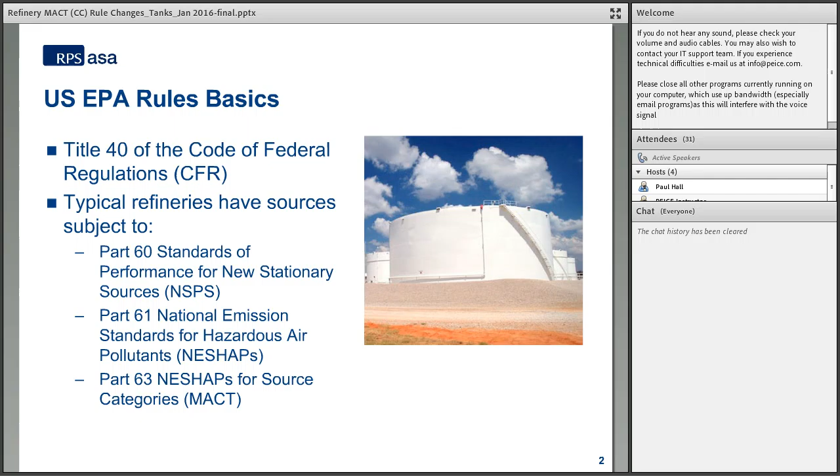So when we look at Part 60, the definition of source, when they say new source performance standards, those sources are going to be emission source specific. So the storage tank would be considered the source. When you talk about the source categories in Part 63, those sources are going to be considered the entire site as the source. So a refinery would be categorized as the source, where each individual storage tank supporting that refinery, located at that refinery, would not be considered the source under that definition.

Under MACT CC, 40 CFR 63 subpart CC, the original rule was published back in '95, and there have been several changes throughout the years. You can look under the Federal Register here. I have all of the changes that were made over the years listed here. The most recent, which we're interested in today, was published December 1st, 2015.

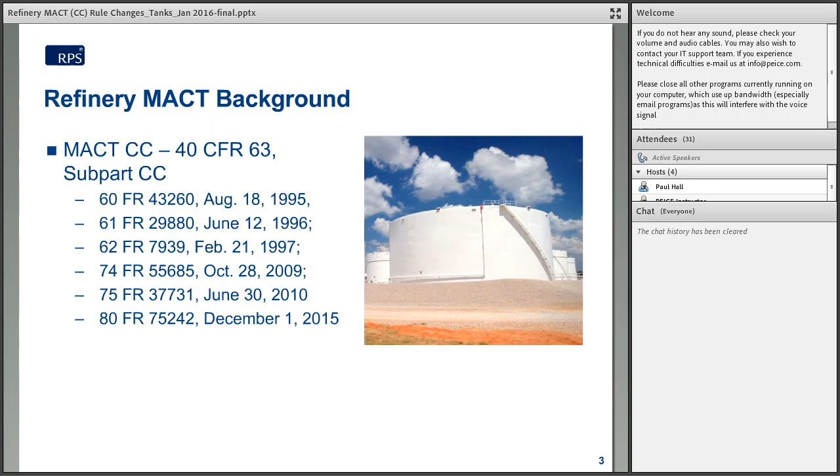Because of those changes, there are some major applicability and control requirements that may be triggered. So when we look at the control requirements for storage tanks, we need to make sure we're talking about the applicable tanks at the site. The MACT structure is set up such that you have a Group 1 storage tank and a Group 2 storage tank definition. Group 1 storage tanks will be required to comply with all of the controls, monitoring, record keeping, and reporting. Group 2 storage tanks are everything not defined as Group 1, and those will be exempt from the add-on controls and reporting and record-keeping requirements.

Under the definition of Group 1 storage tank, for an existing refinery built prior to 2014, these volume constraints used to be: the volume cutoff used to be anything greater than or equal to 47,000 gallons would be applicable.

Now the EPA has changed that to have two different volume cutoffs. One is from 20,000 gallons to 40,000 gallons, and the other being anything greater than or equal to 40,000 gallons. So whereas before if you were below 47,000 gallons you were automatically exempt from Group 1 status, now you have to look at only anything below 20,000 gallons as automatically exempt.

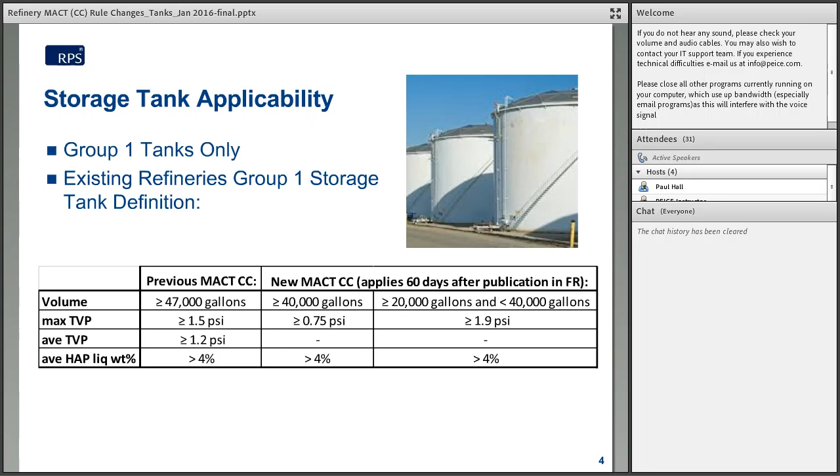For a new refinery or a reconstructed refinery, the definition is different. Again, there are very few new refineries in the U.S. The only ones I know of in the last couple years being built now as new refineries are the condensate splitter units at several terminal facilities, enabling them to take the shale crude condensate and process it further into additional refined products for further shipping.

I know of a couple of them recently that have gotten the applicability determination from the EPA that they will be subject to MACT CC and will be treated as a refinery process unit. So any storage tanks impacting, feeding, or handling products from that condensate splitter unit will have to comply with this definition for Group 1 storage tank.

The main change here is, as you can see, the previous MACT had the breakdown from 20 to 40 and anything greater than 40. Those haven't changed, but the vapor pressure requirement for tanks between 20,000 and 40,000 gallons has gone from 11.1 psi to 1.9 psi. So that's basically almost every product that is required to be in a floating roof tank potentially subject.

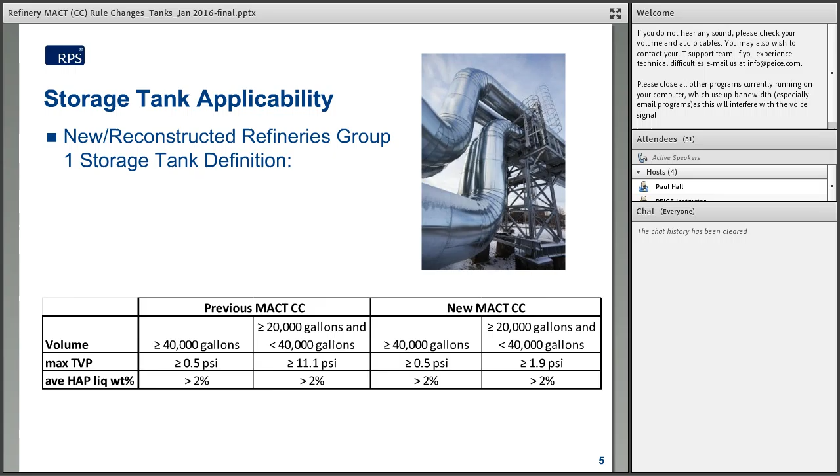So now, once we've determined which Group 1 storage tanks you have at your site, whether existing or new, there are some exemptions for which control strategies you're allowed to choose. If you're an existing or new storage tank or facility with a Group 1 storage tank that's also subject to the new source performance standard KB, then you can elect to continue to comply with KB, with some exemptions for delaying repair and inspections, and some clarification on guide pole controls, meaning you have to comply with the no visible gap requirement for your guide poles.

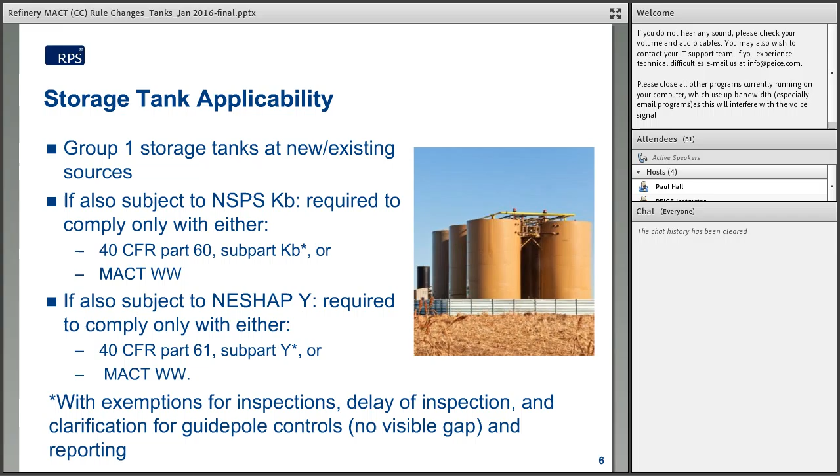So you can either comply with KB with these minor exemptions, or you can elect to comply with the MACT WW, which is the uniform storage tank regulation. So you can elect to comply with either. If you're also subject to NESHAP Y, which again is the National Emission Standard for Hazardous Air Pollutants for benzene, specific to benzene storage tanks, then you can elect to comply with either subpart Y, or you can elect to adopt the MACT WW.

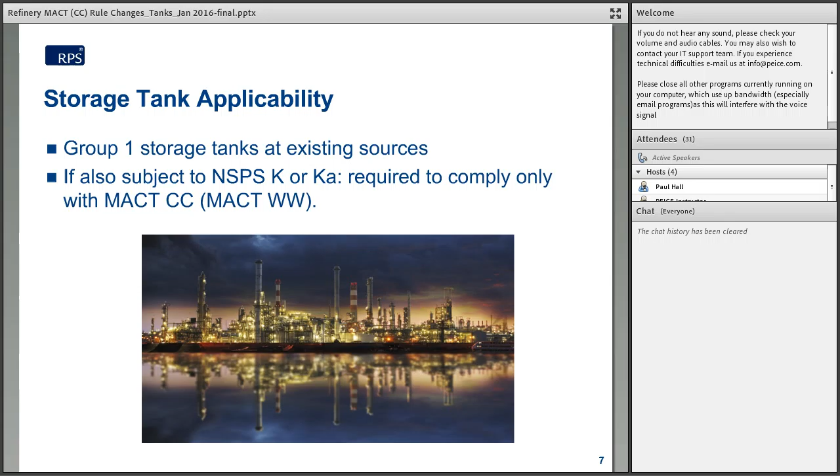If you are a Group 1 storage tank at an existing source—and several of these refineries out there will be an existing source—and you're also subject to NSPS-K or KA, these are the new source performance standards for storage tanks that came out prior to KB, then you'd be required to comply with MACT-CC, which references MACT WW.

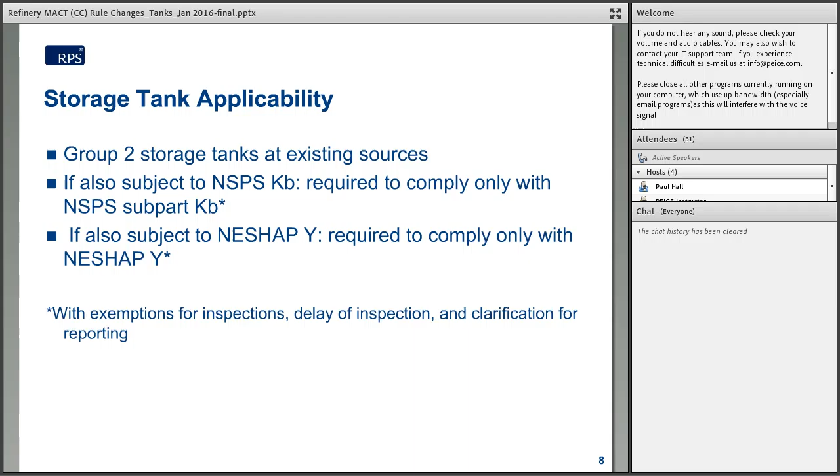Group 2 storage tanks at existing facilities: if you're subject to KB, then you're required to comply with KB. If you're subject to NESHAP Y, then you're required to comply with NESHAP Y. If you're at a new source and you are applicable to NSPS KB, but you were not required to apply controls under KB, then your applicability under MACT-CC will now have MACT WW trump. So you're going to have to look out for any Group 2 storage tanks at your new sources that were not required to comply with controls. Now you're going to have to look at the WW applicability. And same with NESHAP Y—you'll have to comply with WW.

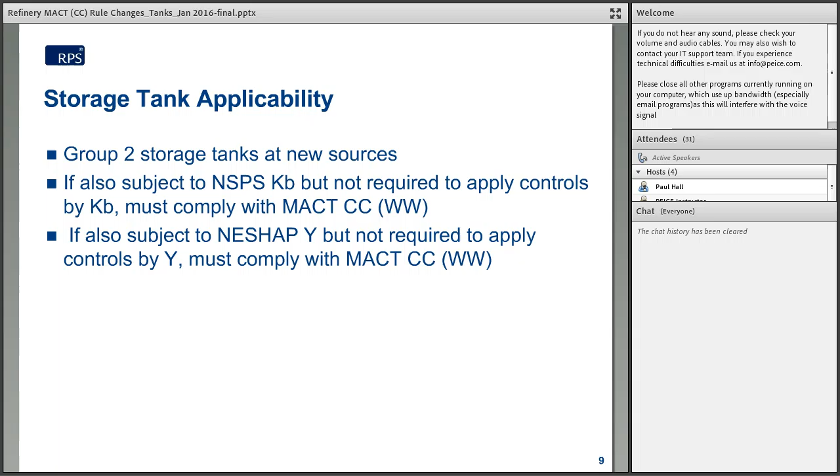So the previous MACT, Refinery MACT-CC, referenced subpart G for the non-NSPS KB tanks. Now they're going to be referencing WW with some additional clarifications. And because of these MACT WW issues, they're going to be requiring potentially new fittings.

So typical refineries in the country are going to be around greater than 50%, probably more often greater than 75%. That means that typically anywhere from 25 to 50% of those storage tanks that are not applicable to KB will have to have this analysis performed. Additionally, it's beneficial while you're performing these analyses to ensure that even though it is a KB tank, those controls are actually in place, because a lot of times what you have in your paperwork doesn't match what's in the field. So for those of you who don't know, I would suggest getting a quick audit started to make sure you know and look at what the applicability determinations are for NSPS KB.

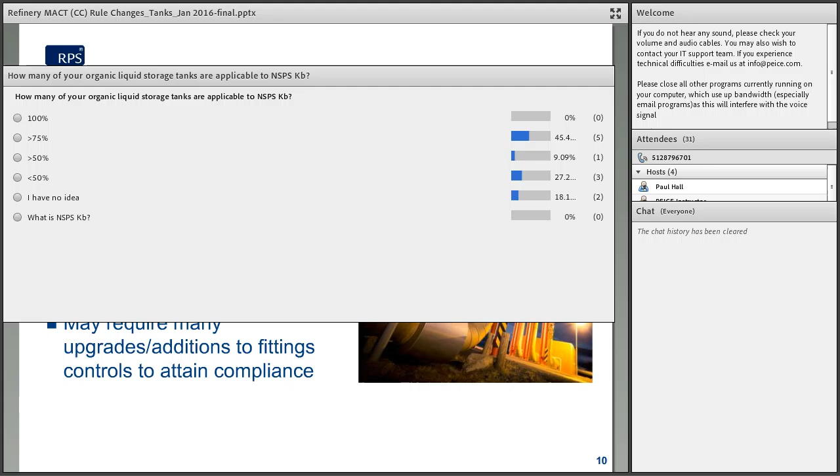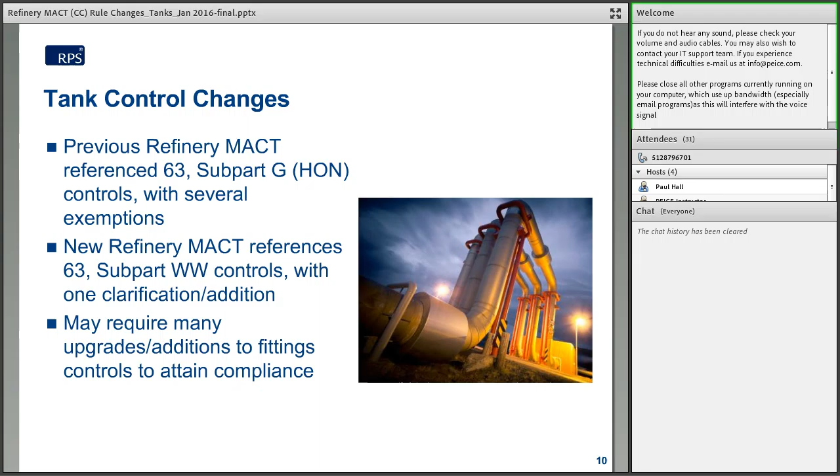Once you've determined how many of your storage tanks are going to be requiring these subpart WW controls, then it's important to understand what has been required in the past. MACT previously exempted some of these floating roof storage fittings from having the well that extends below the liquid surface. Now MACT, referencing WW, is going to require all openings except for vacuum breakers and rim vents to extend below the liquid surface.

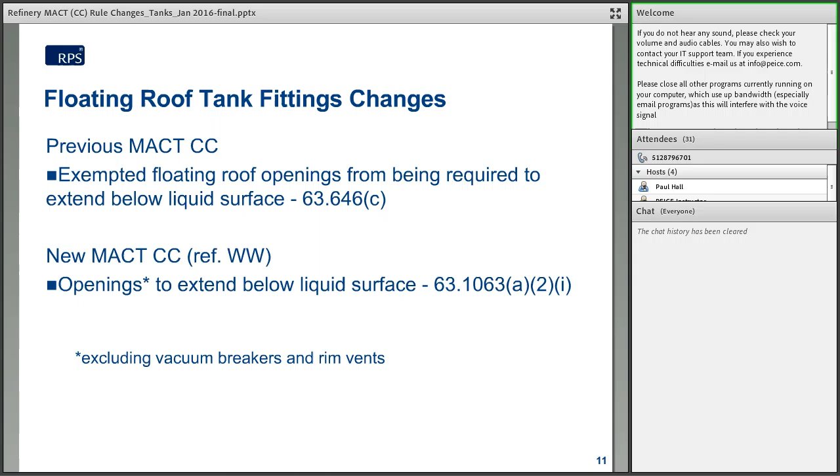So all fittings except for vacuum breakers and rim vents are going to be required to extend below the liquid surface. For well covers, all covers on these wells were previously exempted from being gasketed. Now all the covers have to have gaskets that meet a maximum of 1/8 inch gap threshold, and all covers must be closed at all times unless you're opening the cover to access the inside of that fitting.

For the vacuum breakers and rim vents, the previous MACT exempted them from being gasketed also, but now those have to be gasketed. Here I have the example of the rim vent. This is why they're not required to be extended below the liquid surface - you can see it opens up into the annular space underneath a rim seal, and at the top of this vent you have this cover, which is going to be required to be gasketed.

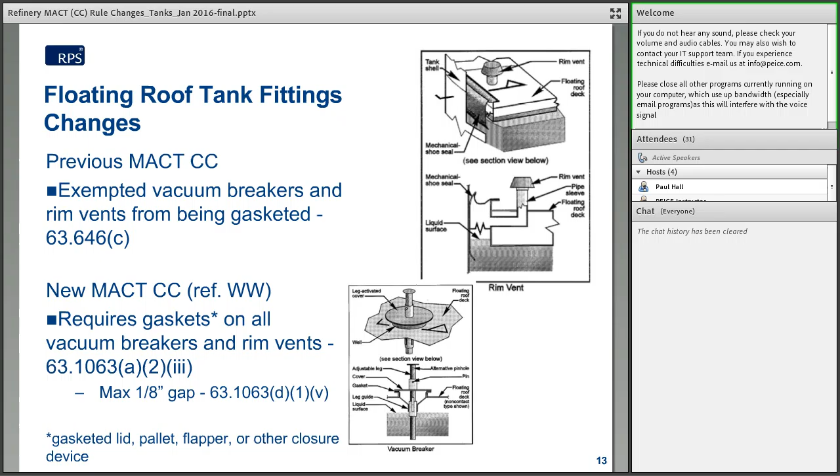Here is your vacuum breaker. That will not be required to extend into the liquid surface. However, you will be required to have a gasket that goes around this entire cover.

For column wells - these are the support columns for a fixed roof tank, for an internal floating roof tank that has a floater inside a fixed roof tank. In order to support the fixed roof structure at the top of the tank, you have to have these columns in place, and those will be required to go through the floating roof tank, so you'll have a well that surrounds them on the floating roof tank. That cover used to be exempt from any controls under MACT.

Now that cover is going to be required to either be gasketed or to be a flexible fabric sleeve. I haven't shown a sleeve here, but basically it would look like a fabric seal that goes from the top of this well and hugs around the support column, minimizing the surface area underneath this cover.

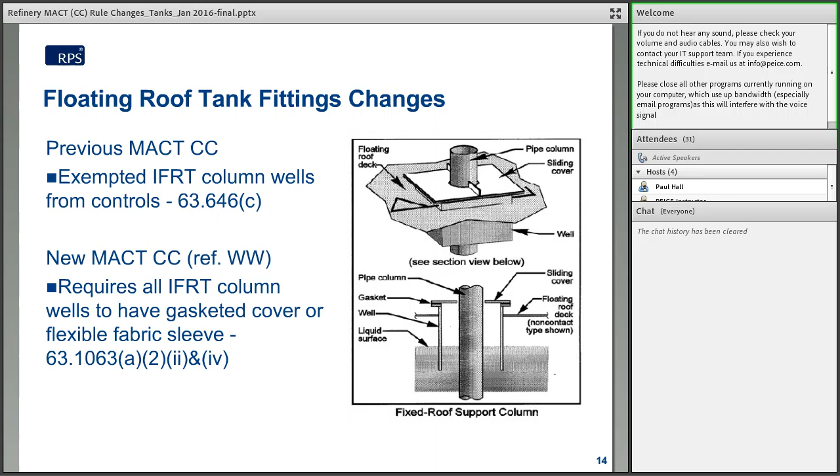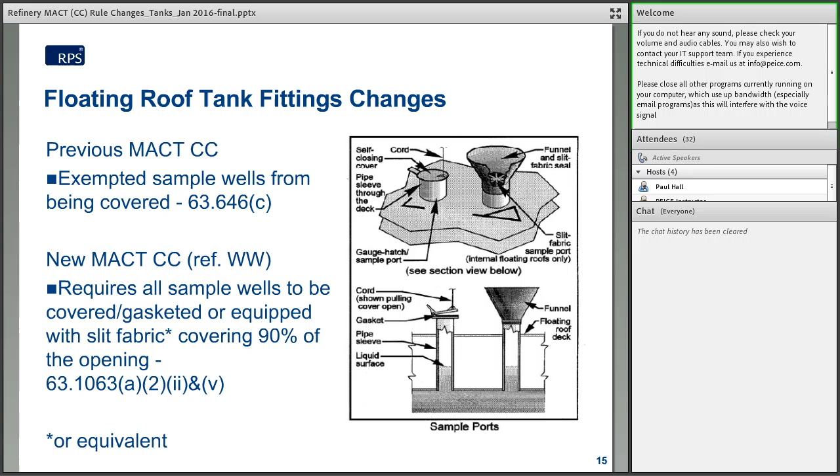Those were previously exempt. Now you're going to have these covers, with bolts or other fasteners to keep those in place during operation, during routine operation.

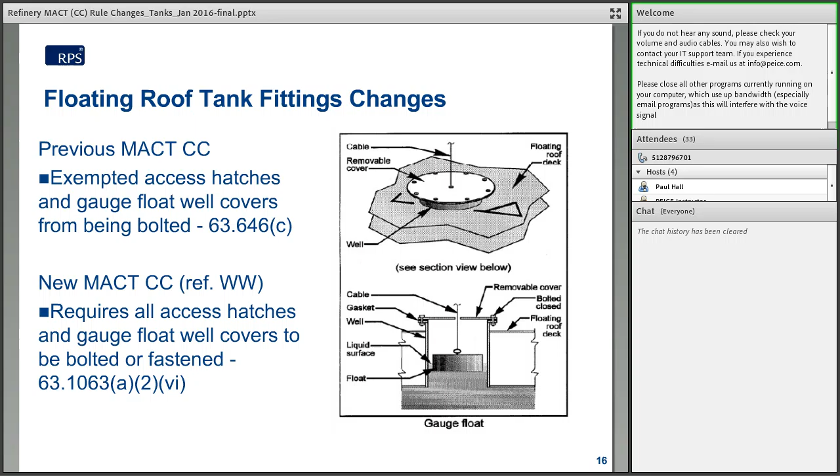Unslotted guide poles were exempted from controls under MACT-CC. Now you're going to have to either have a pole wiper and a gasketed cap at the top of the guide pole. I'll show you a picture here.

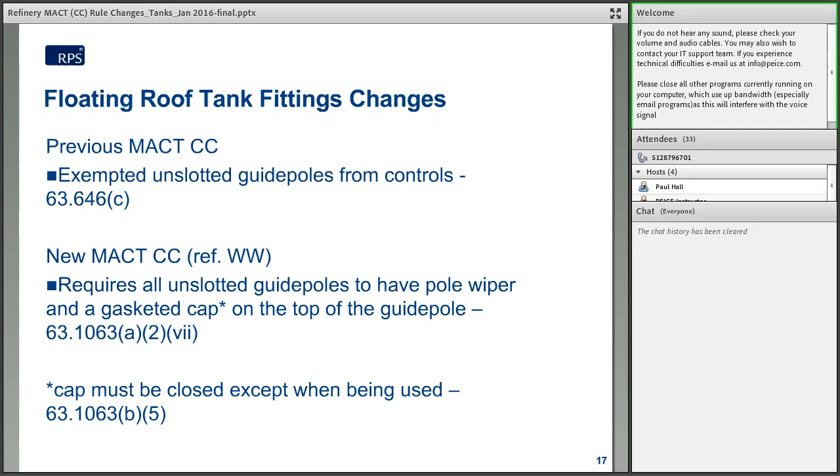This unslotted guide pole has - if you imagine that thief hatch, that gauge hatch I showed earlier, and this pole extending all the way to the top of the observation deck - having that hatch at the top would constitute the cover. Here your well cover is going to be required to be gasketed, as mentioned before, but you're also going to be required to have a pole wiper, which goes around the inner space of that cover and basically wipes the pole down as the liquid level is drained.

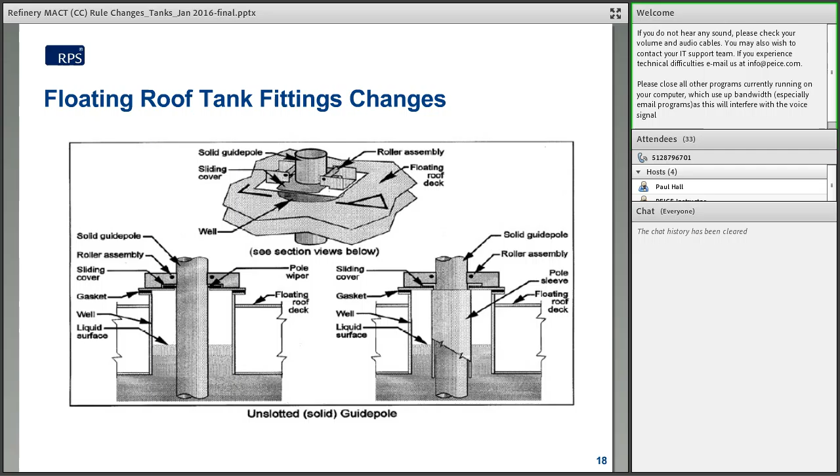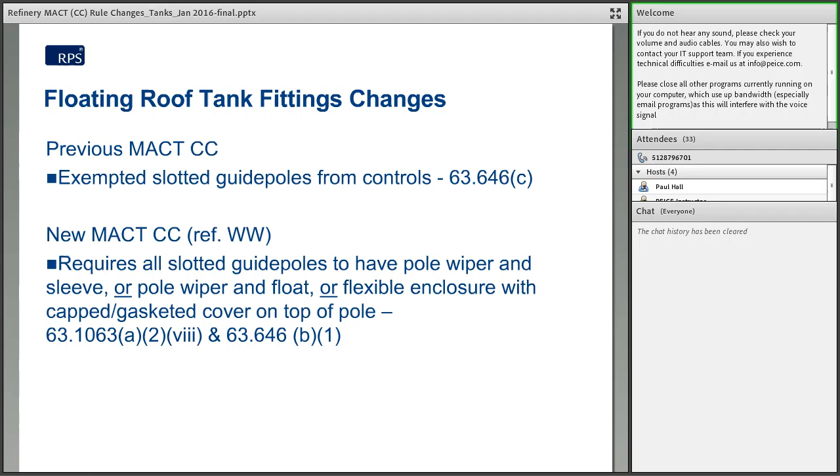Slotted guide poles were also exempted from control under MACT-CC. Now you're going to be required to have all the slotted guide poles with either a pole wiper and a pole sleeve, or a pole wiper and pole float, or a flexible enclosure around the outside above the floating roof, and the cap or gasketed cover at the top of the pole.

That flexible enclosure will basically turn the slotted guide pole into an unslotted guide pole, because there will be no slots above the roof since it would be enclosed by the flexible enclosure.

I don't have a picture of that here, but imagine for this slotted guide pole, the liquid surface could evaporate and the vapors can come out of the holes under the deck and come above the deck and escape through those holes above. So the purpose of the wiper, gasket, and float is to block the pathway for those emissions and minimize that pathway for emissions to come into the holes underneath the deck and escape through the holes at the top.

So this would be an example of a wiper and a float, and the float has to extend above the wiper. You see the float on the right side here is below the wiper, but you also have a pole sleeve in place, and that would be okay because the sleeve here is going to basically prevent the vapors in this vapor space from migrating out of those holes.

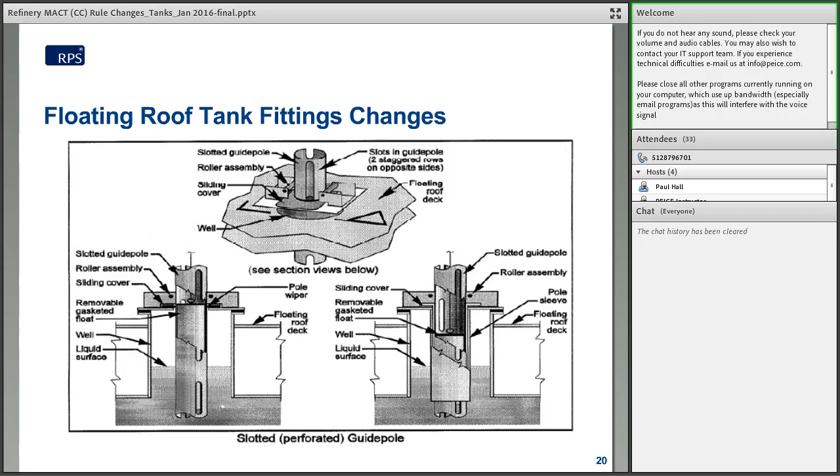Additionally, ladders that were equipped with slotted legs acted as slotted guide poles, or can act similar to slotted guide poles in their emissions characteristics, and so those were not addressed in MACT-CC. Now they're going to be required to have similar controls as a slotted guide pole: a wiper and either a float in the slotted leg, or wipers and a sleeve, or a flexible enclosure with gasket and weld at the top of that slotted pole.

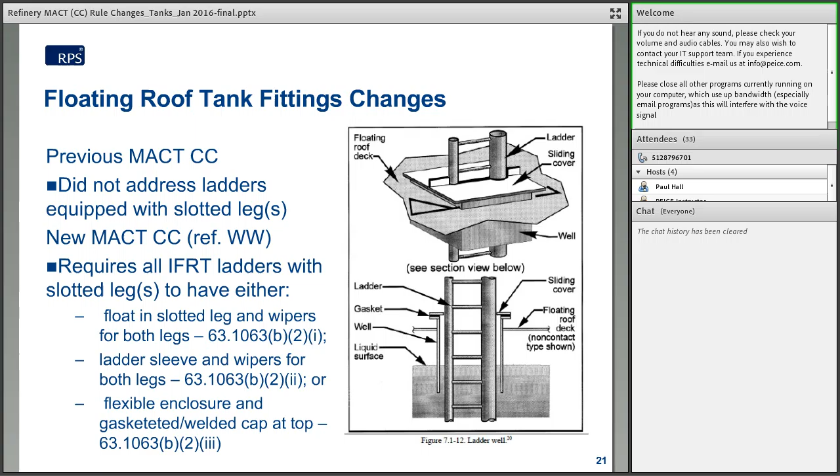Before we go and do this last, we'll talk about the compliance schedule here. There's an effective date for the rule: February 1st of 2016. It's coming right around the corner.

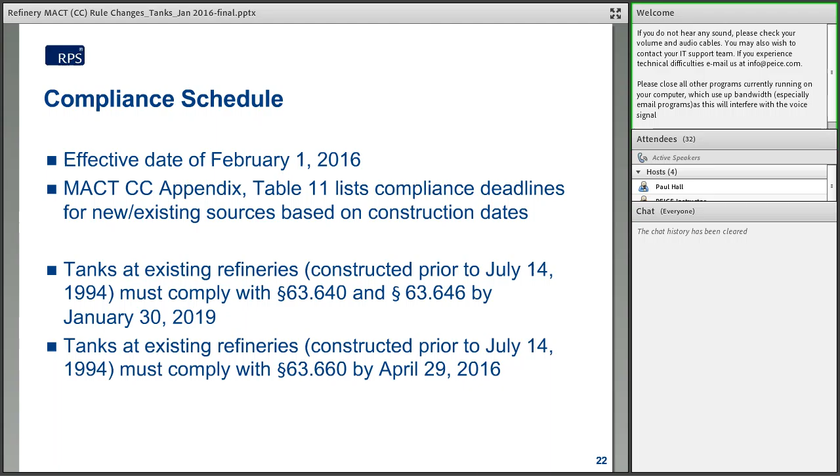For existing refineries, the tanks that must comply with 63640, the general requirements, and 63646, the old storage tank standards which include the reference to KB, are required to comply by January 30th, 2019. For the new 660 standards, those are required to comply by April 29th, 2016. So it's a very aggressive schedule for existing refineries.

Note that if you have a vessel that went from Group 2 status in the old definition to the new Group 1 status because of the change in the Group 1 definition, then you're allowed to comply with those controls by January 30th of 2026, or by the next time the tank is emptied and degassed. But it can be no later than January 30th of 2026.

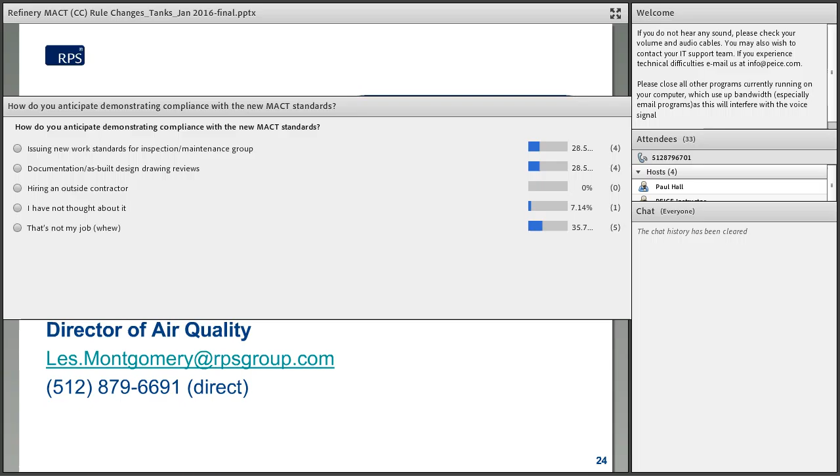For those of you who said issuing new work standards for your inspection and maintenance group, please be aware that some training ahead of time is very, very effective for your maintenance and inspection groups. Typically they do not speak the same language as environmental, and if you rely on them to do field verifications of your fittings and controls, it's often that they will come back with the wrong counts or wrong information. So a little training on the front end is very helpful. We do that type of training, so if you ever want help, let us know.

Also, for those of you who want to review your as-built design drawings, note that those are not always accurate, and changes are made over time that may not be captured on the drawings. So be real careful about relying on paper. Field verifications are very helpful.

If you're going to hire an outside contractor, we can totally help you guys manage the project internally. We also have people who've walked tanks, stood on floating roofs, and got inside empty degassed tanks. We can do that field work for you. If you haven't thought about it, then you might want to start thinking about it now. Like I said, the compliance schedule is very aggressive. And if it's not your job, then lucky you.